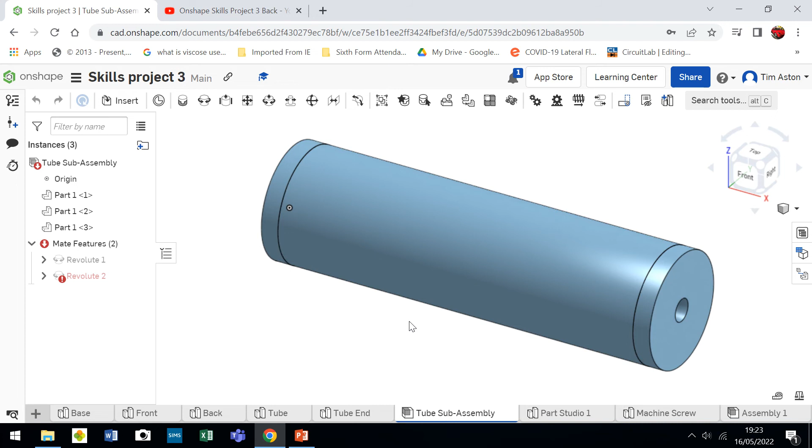In this tutorial, we're going to create the laminate, the curvy bit that goes onto the front. So we need to create a new part studio, and that's going to appear here.

I'm going to right-click and call this laminate, L-A-M. We're going to create a sketch on the front plane. I'm going to look at it from the front and draw a line anywhere along there, as long as it's completely vertical, and change the dimension to 70 millimeters.

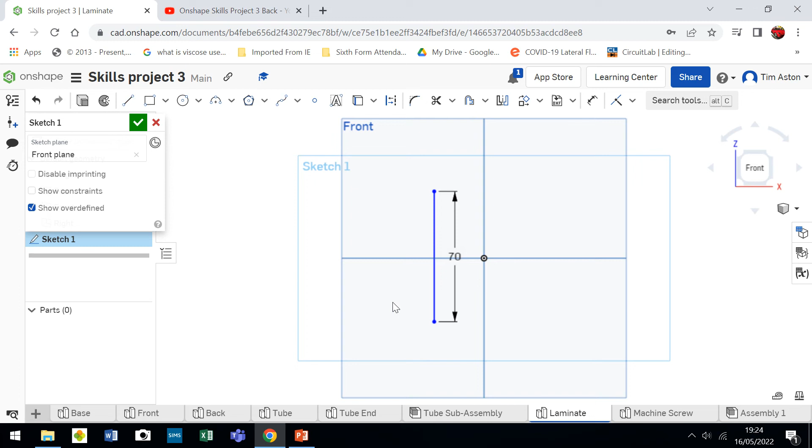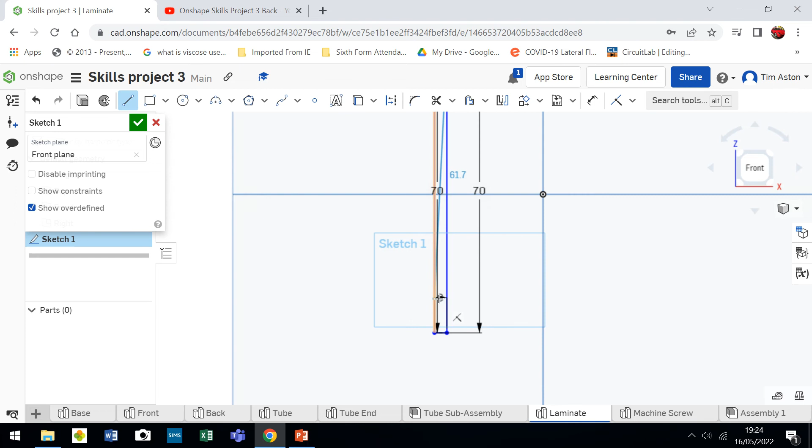I'm then going to draw another line from the end point of the line we've just created, out to the right, and this is going to be 3 millimeters. Then go up by 70 again. That went to 7, so we're just going to delete that, and draw a line from there, change the value to 70, and escape to confirm that.

Right, we need a curvy bit now. It's a little bit more challenging, so I'm going to draw a line from here - this line we'll get rid of in a minute, but it's just going to be a guide. I'm going to change this size to 130, so the laminate is about 100, and there's about 200 millimeters in total. I'll escape to confirm that.

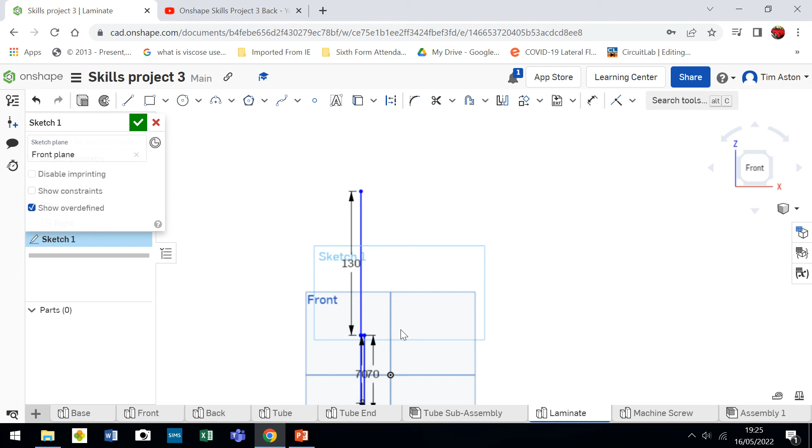We're just using this as a guide for the time being, and we're going to use the 3-point arc tool. I'm going to zoom in, and the first point of the arc is going to be the end point here. The second point, I'm going to ghost the line along there and select a point that's 130 millimeters above it.

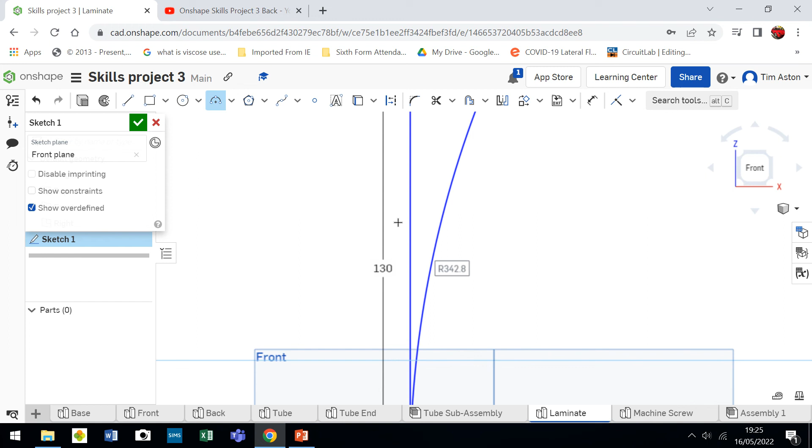That will allow me to be a little bit flexible about what I want to do with the curve. You can have your own artistic license here, but I'm just going to want a fairly shallow curve on that. And that's fine. I'm going to delete that line there.

What I want to do now is copy that. So I'm going to select it, and we're going to use the offset tool up here. I'll click the offset tool, and the dimension of the offset wants to go out the wrong direction, so I'm just going to click the arrow and it will reverse it. I want to return, and my offset wants to be 3 millimeters because my laminate is 3 millimeters. So I'll click 3 return.

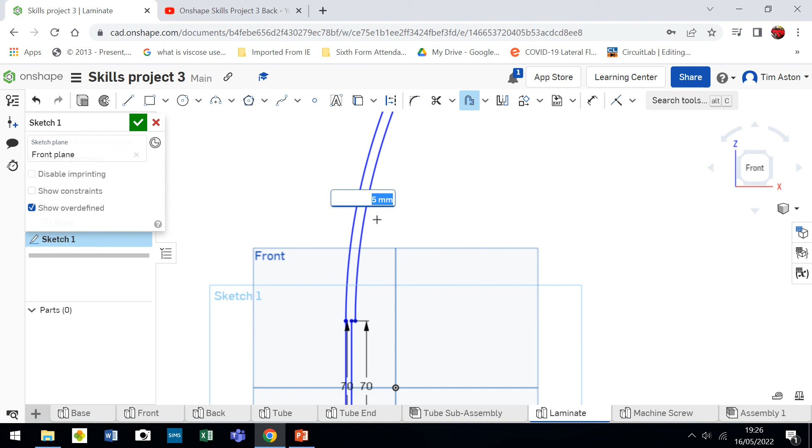Then I need to fill the top in so it becomes a solid. I'm going to draw a line from the end point there to the end point there. And if you notice, it's gone grey now, so we know that we can extrude that.

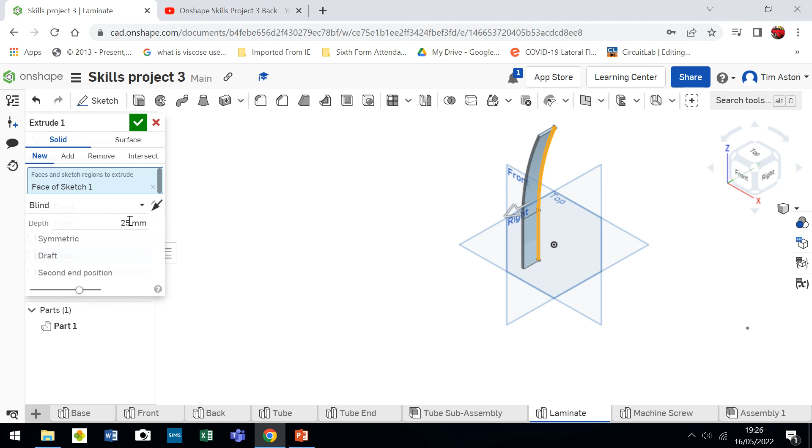So I'm going to click for an isometric view. I'm going to confirm my sketch, and I'm going to extrude my laminate through 70 millimeters. Just change the value to 70 and click the confirm button. And you'll notice we have a laminate now.